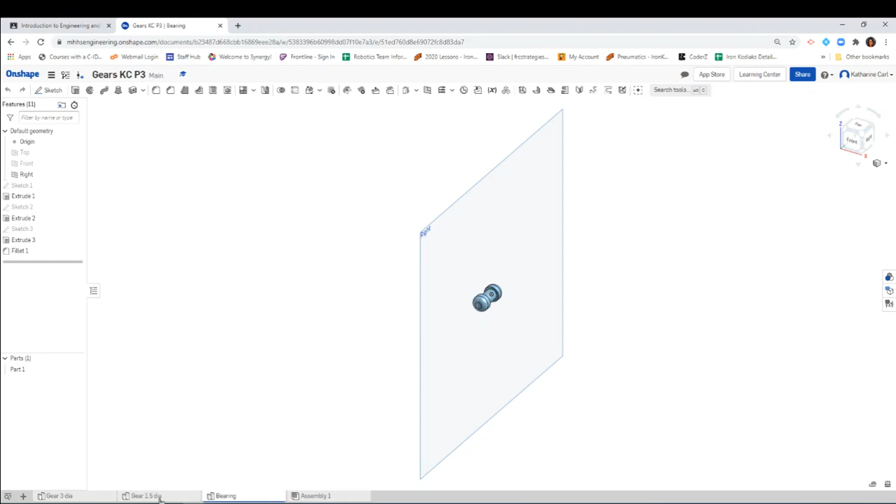Some of you might have the exact same pieces, some might have ones that are a little different. Either way, you need to click on Insert and put in both of your gears and then put in 2 bearings, because you have 2 gears, so you need 2 bearings. Right now, none of them are constrained.

But similar to what we mentioned before, our first step is to always fix one of our parts, and we'll be fixing a bearing. But before we do that, I'm going to fasten my bearing to the origin, because I think it's important to fix things to the origin so we have a good reference point as to where things are located in the graphics area.

So I'm going to go ahead and do that first. I'll click on this Fasten Mate tool, go over to our origin, and notice either the mate connector, which is that disc, is facing horizontal flat, or if I move my mouse it's facing up. I'm going to have it face horizontal flat and click on that.

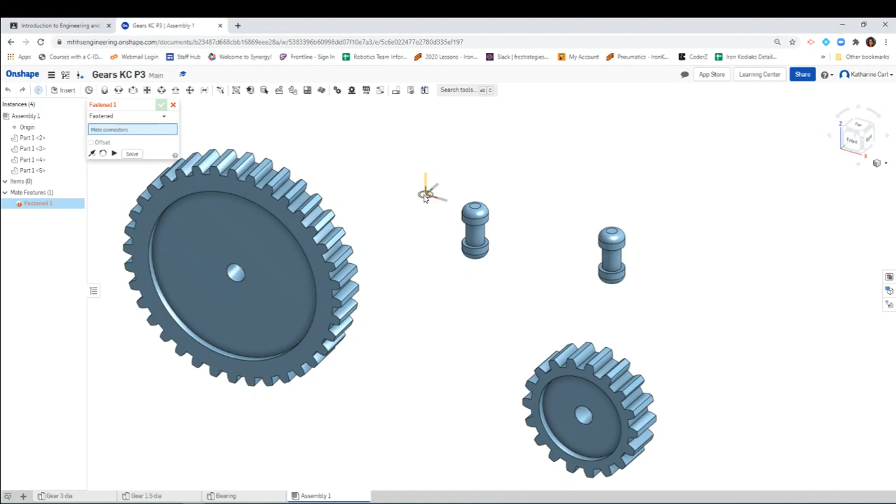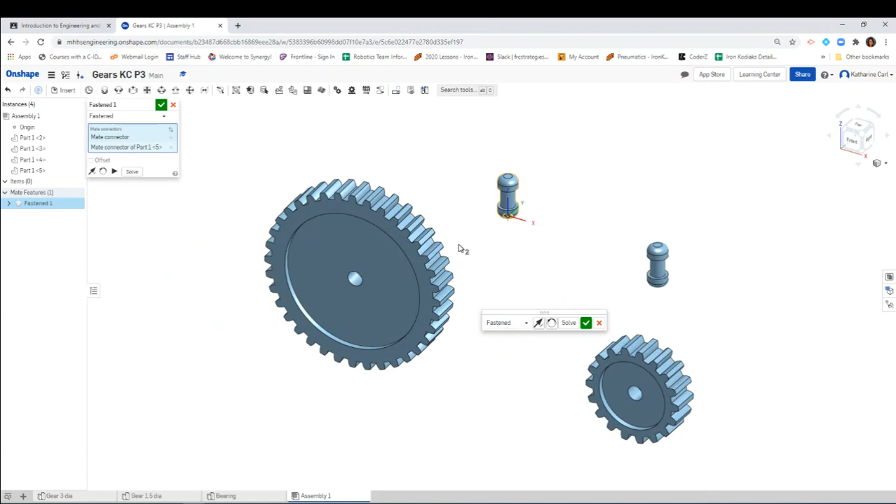Now I'm going to select the bottom of this bearing. I'll zoom in so I can see this whole bottom face better, and just make sure that's on the center — yep, looks like it's in the center. Click to make that stay. If I zoom out and click on my view cube at the corner to get that isometric view, that looks great. So I'm going to click on the green check.

What I'm going to do next is close the Fasten tool, and then fix this by right-clicking on it and clicking Fix. Now notice when I do that, this Fasten Mate turns red, and that's because we fixed it, which is technically interfering with the Fasten Mate.

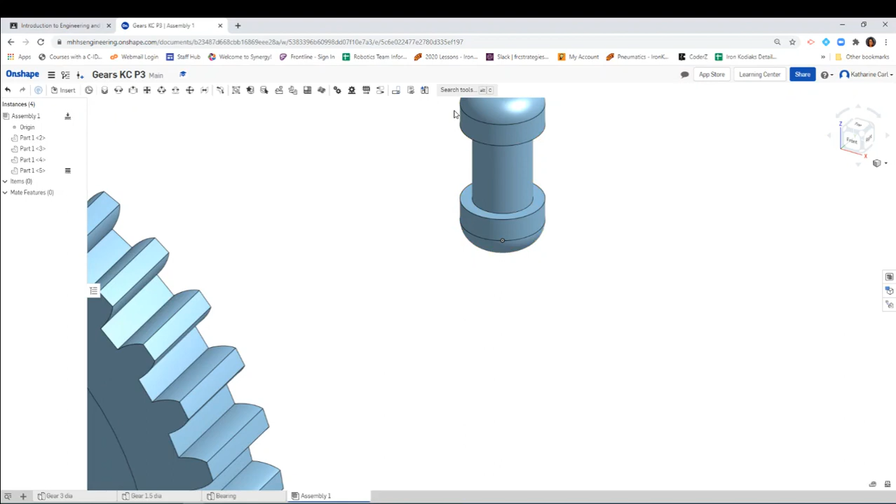So right now I actually don't need the Fasten Mate anymore, because this is fixed. I went ahead, and you can even see the icon over there. So I just used that Fasten Mate to set it up, to locate it and orientate it — meaning the view, how I want it to look.

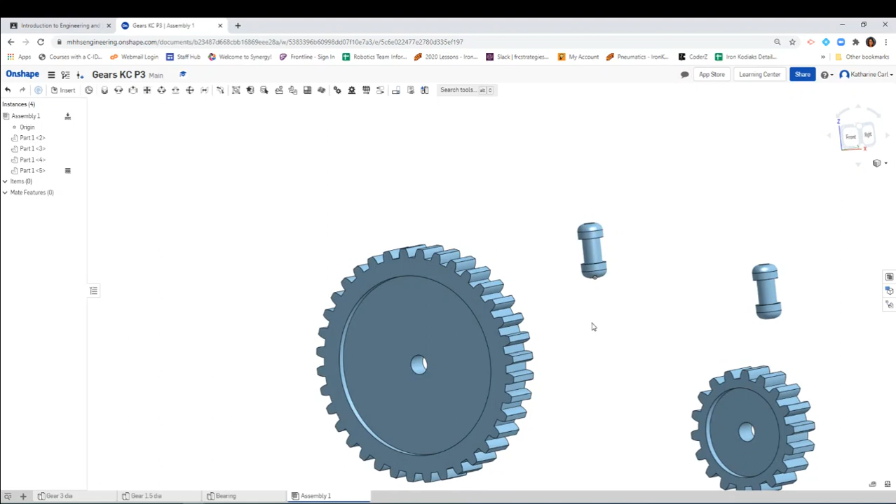Okay, now the next step: I'm going to go ahead and fasten my larger gear to this bearing. In order to do that, I'm going to use a nice little trick to rotate this, because right now I need this gear to turn 90 degrees so it fits nicely in there.

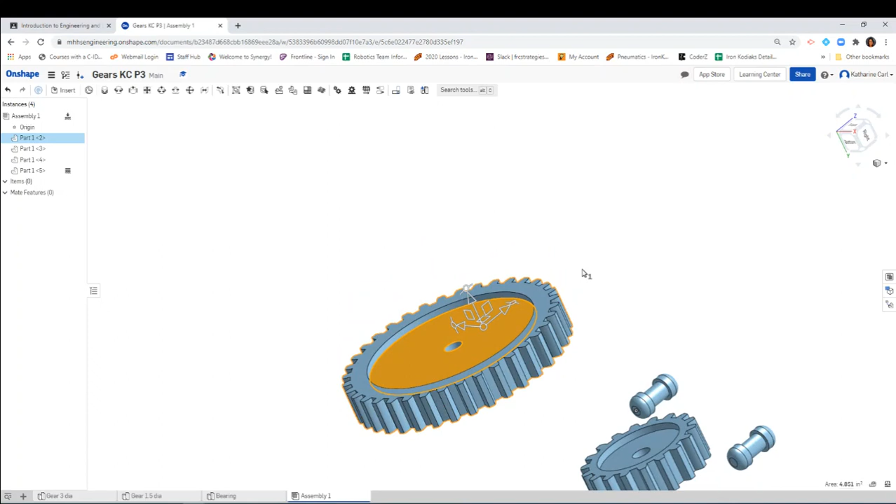So to do that, I'm going to click on this face, and notice these axes turn up — remember the degrees of freedom? Everyone see that? I'll use this top degree of freedom here and rotate it so that it becomes flat. Notice the little box pops open and it says 45 degrees.

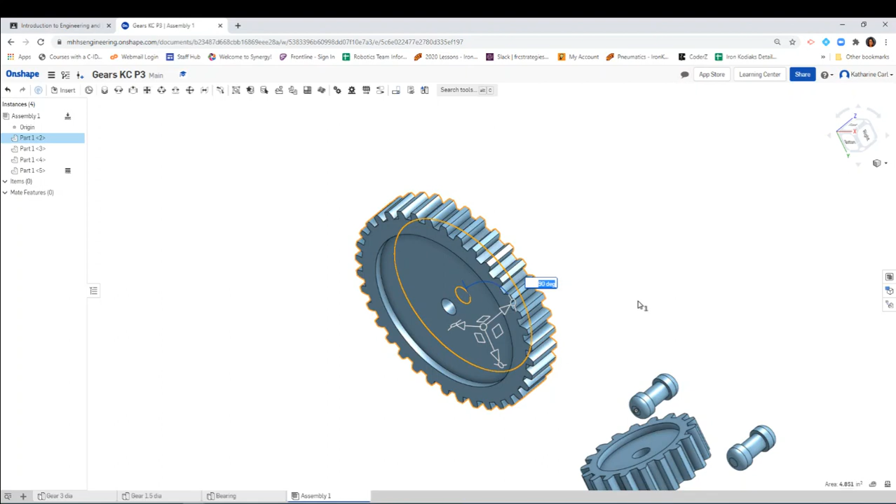I want it to turn 90 degrees, so I'm going to go ahead and type in 90 and hit enter. And it flipped it 90 degrees. That looks good, so I'll click in the space and hit enter so it fully turned. I'm going to double check — it's perfect, look at that now.

When I try to move it, it's in that same plane. So now I'm going to go ahead and use this cylindrical mate — or actually, I can directly use the Revolute Mate. I don't need to do the cylindrical mate, I can just use the Revolute. Click on that, and I'm going to go ahead and select.

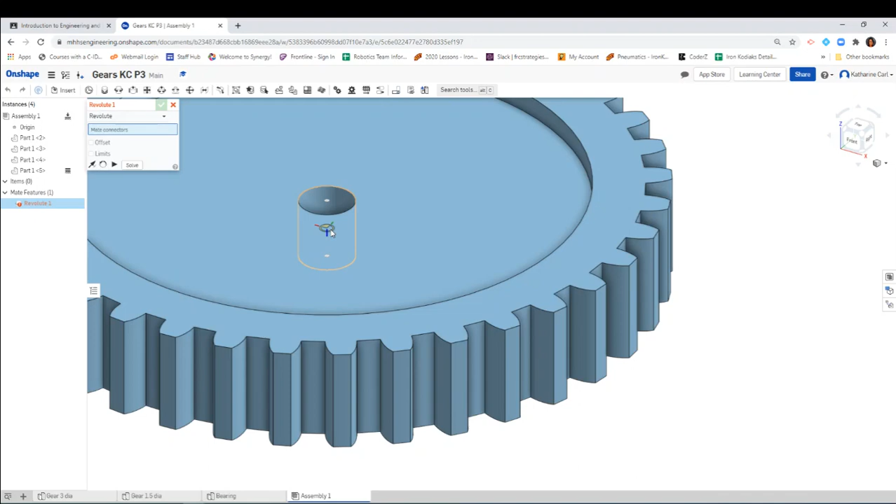See how I went to the cylinder, and if you notice, if I turn that mate connector, that disc is in the center of that cylinder. Let's see if this one works. It might be kind of hard to select it on the other one, but you can do it that way. So move it, if I can find that again, there's a cylinder.

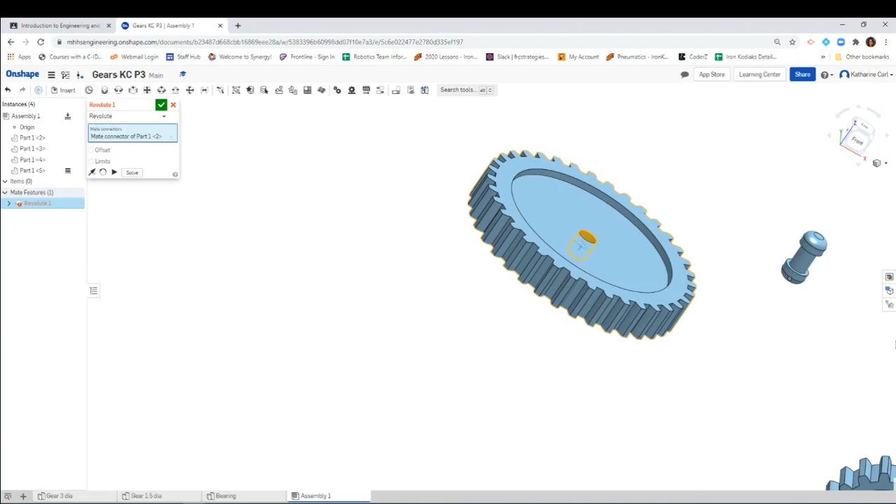That's the middle. Okay, if you click on that one, then what that means is on your bearing over here, the one that's fastened, I'm going to zoom in. I need to select the cylinder, but the center point of that as well. Why? Because then those two mate connectors will connect together. So click on it.

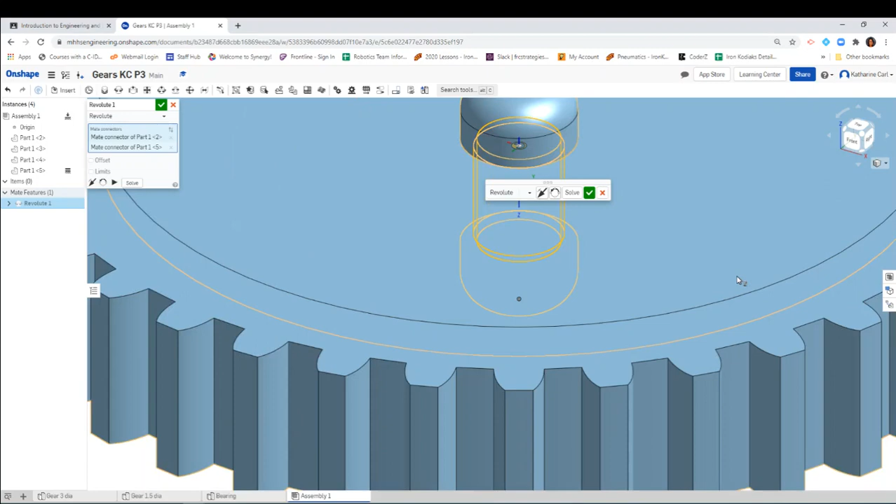And if you notice, there it went. I'm going to zoom out just to get a good preview and kind of rotate it to see it a little bit. Move that out of the way. Awesome, that looks pretty good. Nice, so I'm going to go ahead and click the green check to confirm.

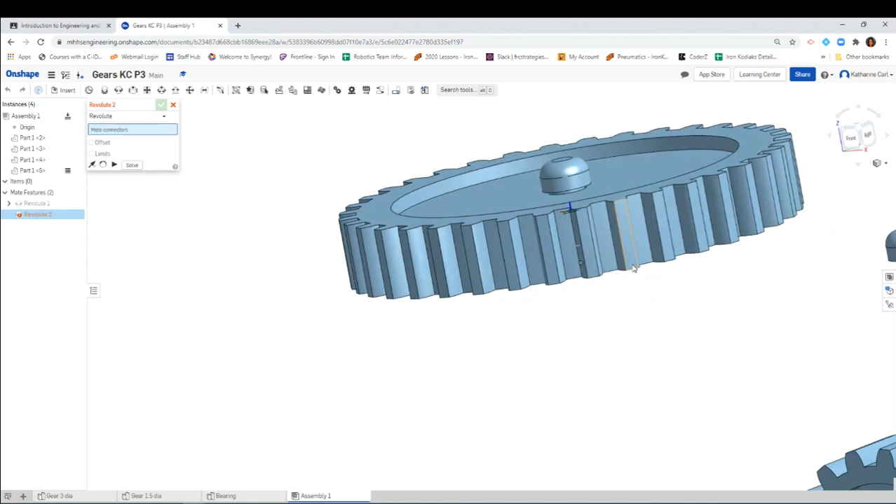And looks great. Again, you can tell it's in the middle because the gear, there's a little gap here, and there's also a little gap on the middle, okay? Let's just verify that it moves. Remember, the whole point of this Revolute Mate is that it changes the degrees of freedom so that it will rotate. And perfect, this gear is now rotating around that bearing when I turn it. Awesome, and this bearing still won't move because it's fixed.

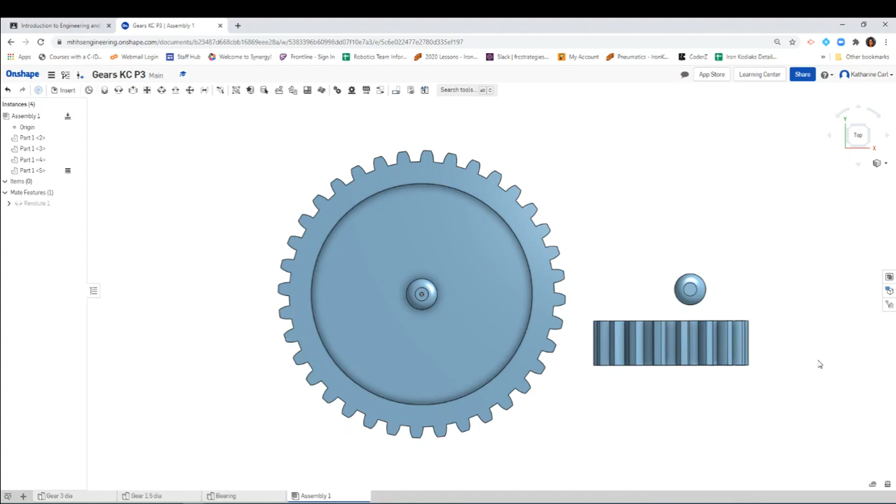So awesome, good step so far. Okay, our next step is we need to kind of start to orientate these two pieces, right? So there's a few things we need to think about. One, if I look at the top view, you want these to be lined up, meaning this bearing needs to be lined up so that it can properly fit this smaller gear. Okay, I also need to rotate that smaller gear. So let's first rotate the smaller gear and then try to kind of dimension and space things out.

All right, so I'm going to click on that face again. Remember, those axes come up. Just zoom in, you'll start to get used to kind of how the axes are. This, you can even play with it. Oh, it goes that way or that way. Nope, let's change that, keep that back at 0 degrees.

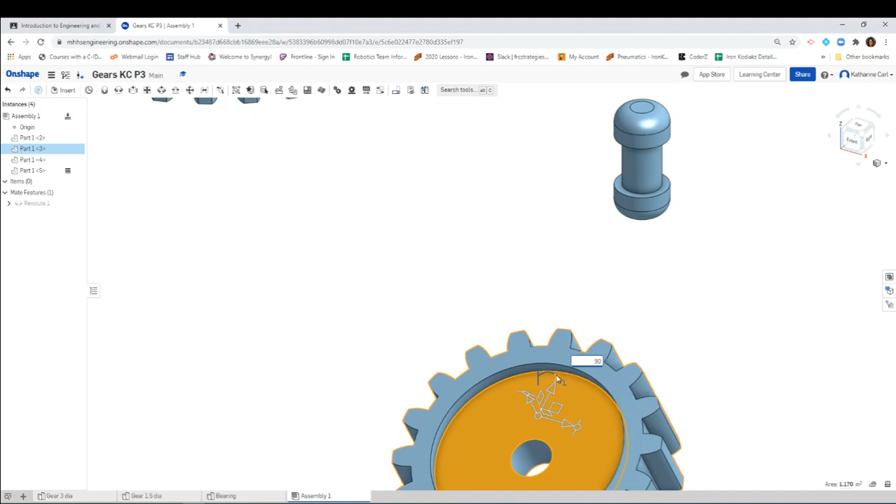Wrong direction. I want to choose this degree of freedom. I'm going to rotate it. Again, I'm just going to type in 90 because that's what I want it to move. There we go, click once on the outside to finish that move.

There we go, so now they are kind of on parallel planes, but if you notice, if I kind of click on this front view, this can go up and down, right? And over, and this, and we need it to line up perfectly. So I'm going to do a few things. And even the same thing with this, right? The bearing, we want to make sure that it's lined up perfectly, and we want to make sure it's spaced out perfectly. You can use the measurement tool and kind of do some measurements.

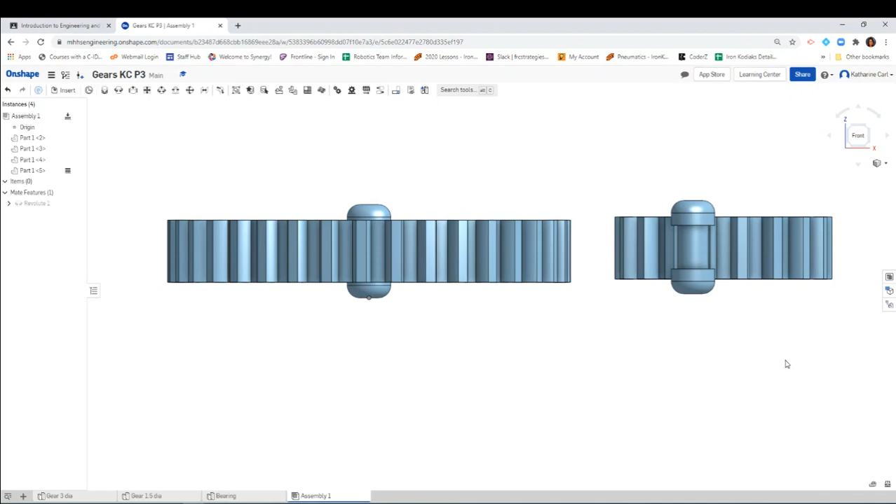I'll show you another way that I kind of like doing it, which is we're going to actually use a new mate tool. This tool right here, this is called a planar mate. And what that does is it causes two planes to mate together so that they are nice, flat, and even. So I'm going to use that, I'm going to use a planar mate.

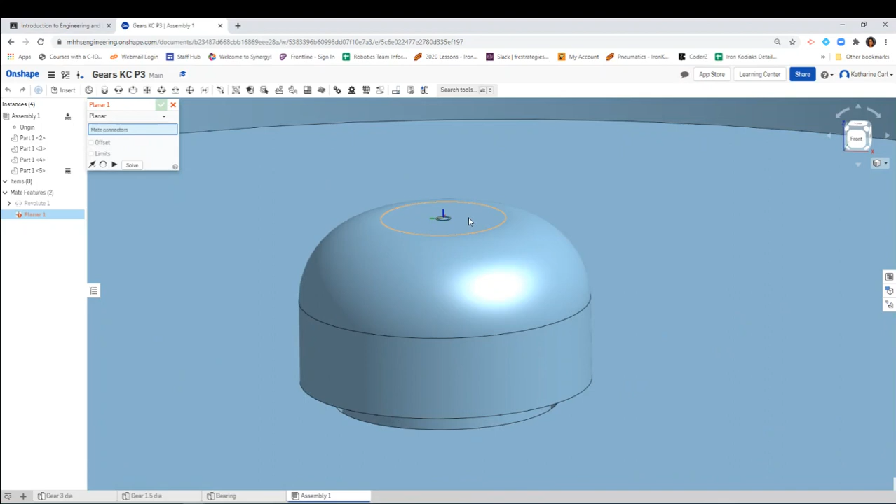I'm going to use this top part of this bearing. So I'm going to click on that. And then I want that to be in line or on the same plane as the top part of this bearing. So there we go. Now let's zoom out to make sure it's there. And I think it actually joined it here. So don't worry, click on the green check.

I'm going to go over here, close this planar mate window. I'm going to go here. I'm going to click and hold and pull that other one out if it is there somewhere. See if we can find it. Should be in there. It is. Okay.

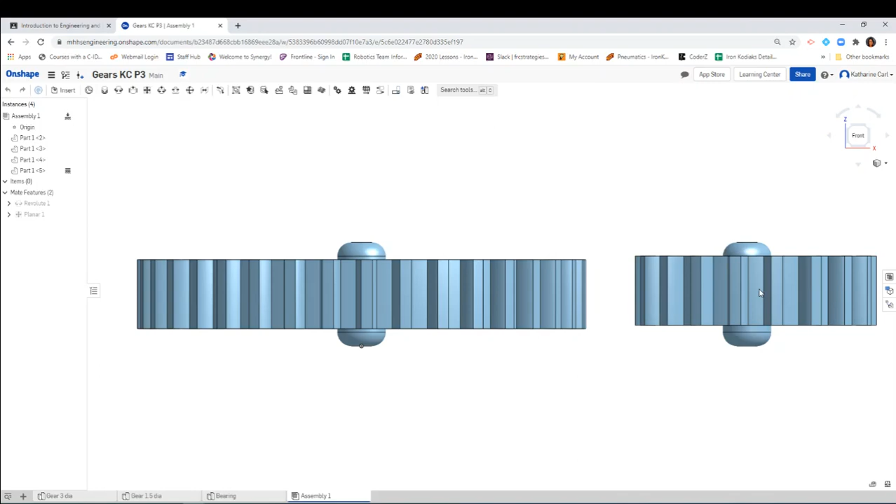One thing to be careful of is sometimes it will appear to be on top. So just click on it and try to move it, and it comes out. But notice the nice thing is it's going to stay — I can't move it up or down. It stays on the same plane, which is what we want. That's a very critical part of these gears.

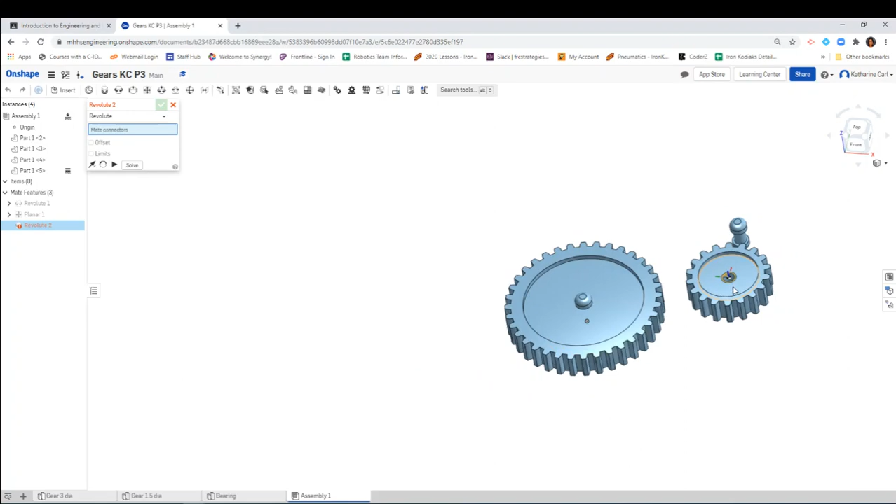The next step is to use that Revolute Mate to constrain, again, the center of that gear with the center of the bearing. So I'm going to zoom in, and I need to find that center point of the gear — there it is. I'll click there.

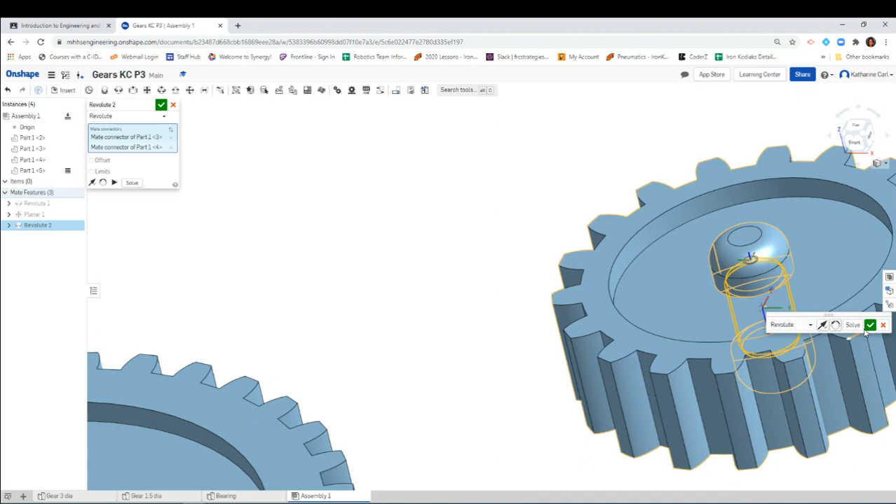I'll go over to our bearing and zoom in here, find the center point, click to make it stay, green check to confirm, then zoom out and close that window. Let's try to rotate that. What's tricky is you can't really tell fully, because this is not fixed, so the whole thing is moving — not only is that gear moving around that center axis, but it's also moving around the entire space because I didn't constrain it.

So that's our next step — how do we constrain them so it doesn't move around that way? Eventually we're going to end up fixing this one. To do that, if I look at the front view, the nice thing is they're still on the same plane, so they're lined up.

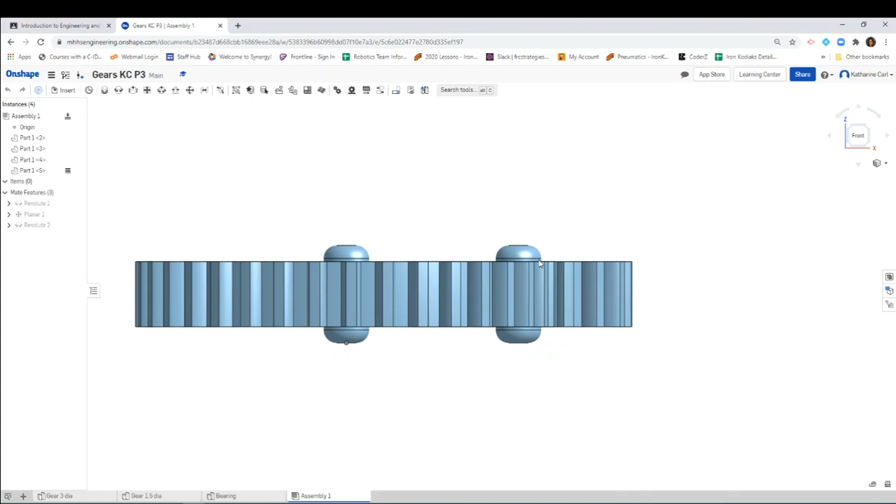I'm going to click here and look at this top view, because I'm going to use this tool called Tangent. Why use this? Because tangent lets you have two curved surfaces line up. So I'm going to click on this.

I'll click on this curved edge, and rotate a bit to see better. I want that inner curved edge to line up with this outer edge, because you want the groove of that tooth to go in towards that piece. So click on that — and notice, it moved them in.

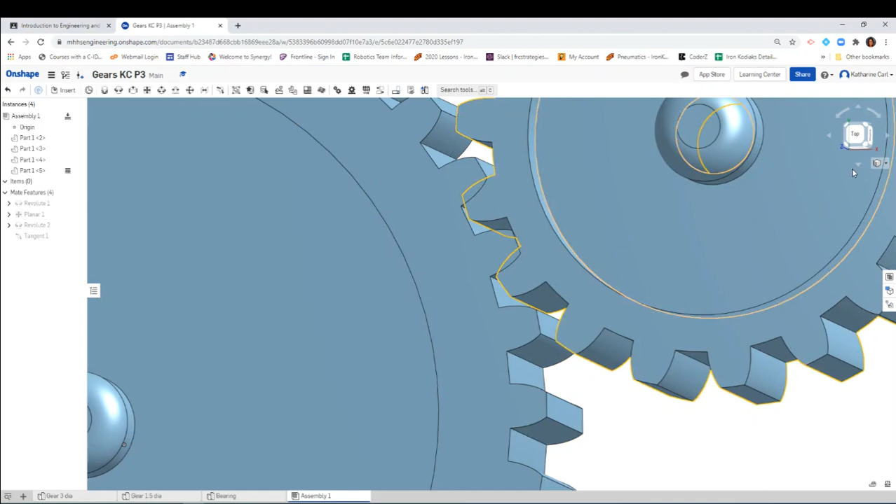Green check. Now it's still going to move, and I'll show you what happens — see how this will still move, and you can actually rotate it and spin it around. Technically, some gears do work that way — this is what we call a planetary gear, because it's rotating around like a planet.

But we want this to be stationary. So now that we're spaced correctly, I'm going to click on that top view, rotate it around, make sure it's in the right spot, and also line up the gears. That looks about right — pretty good.

Now that I have it where I'd like it, I'm going to rotate it, click on that bearing, right click it in the features list, and fix that one. Now notice that planar mate caused an issue, so I don't need it anymore — since it's fixed, I can right click and delete that planar mate.

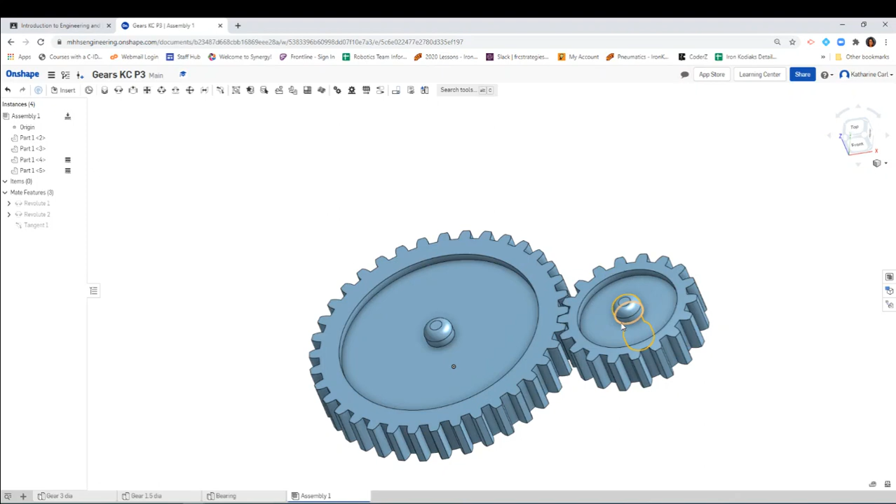I do not need it anymore, because it's fixed. And this gear, the smaller gear, is also mated with the Revolute Mate to that bearing, so we don't need that one anymore.

Now notice it should rotate properly — let's check it out, rotating it around. Awesome, that rotates, it's not moving. But again, the idea and purpose of gears is to have one gear rotate and cause the other one to rotate.

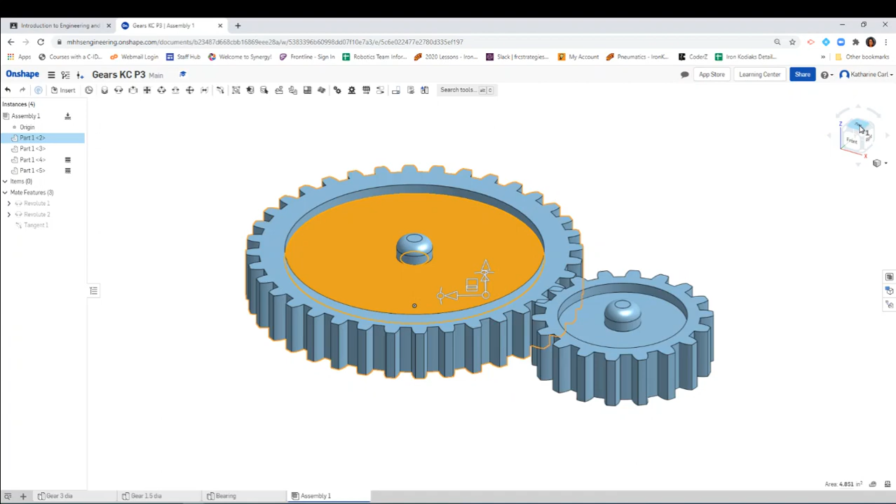So let's just line these up again. I'm going to rotate this — that looks about right. We are actually going to be using this gear relation.

It's a great tool. I'm going to go ahead and click on this one. What you have to do now is click on the Revolute Mates. Another big thing is you have to click and also change the ratio, the relation.

So I'm going to click on this one, and then I'm going to click on this one, and the relation between the two is, I believe, 35 divided by 18. Let's green check. But if you notice, this didn't quite line up. Oh, there it is. Now it's going again.

What's funny is I think I entered the wrong ones, because if I slowly move it, this is where you'll have to kind of test it out a little bit. They're moving in the right direction, right? But that's larger gears moving faster.

Okay, so let's try that again. Delete, and I'm going to click on the top view. I'm going to line it up kind of how I would like it to be lined up. You can kind of rotate this one so that it looks a little bit better. This one. Okay, gear relation.

All right, so this time I'm going to still use that 35 divided by 18, or it might be 16. Let's count—I'll close this to kind of count it up. So ideally what we're doing is we're counting the number of teeth, right?

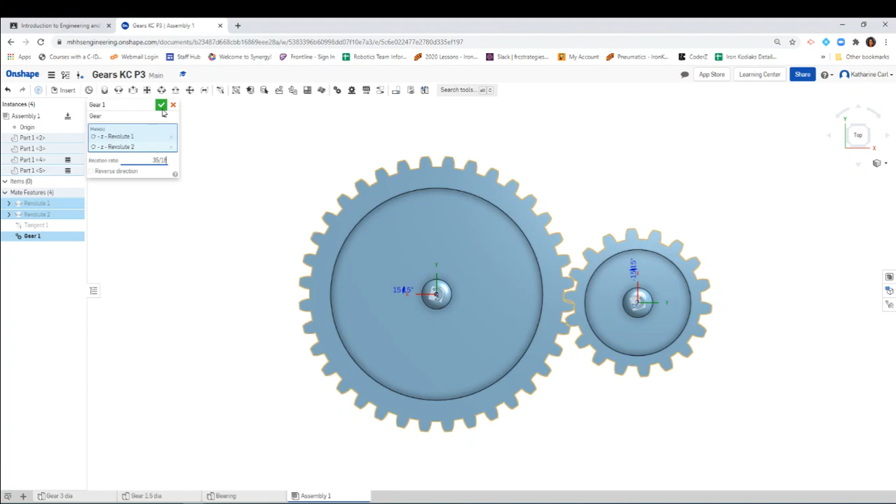And again, we're going to use that relation for the gear relation. So click on the gear relation again. This time we are going to click on the larger one first, then the second one, and then I'll still enter in that 35 divided by 18. I'm going to go ahead and click on the green check.

And let's go ahead, turn and rotate, and let's see, make sure it's going in the right direction. Rotating it kind of fast. There we go, they are going in the right direction.

So if you notice your gears are not rotating correctly, like if they're rotating in the wrong direction, you can just double click on this gear ratio again and reverse direction. I'll do it so you can see what happens. So now when I do that, if you notice, they're both rotating in the same direction, but that's not how those gears would really function, okay?

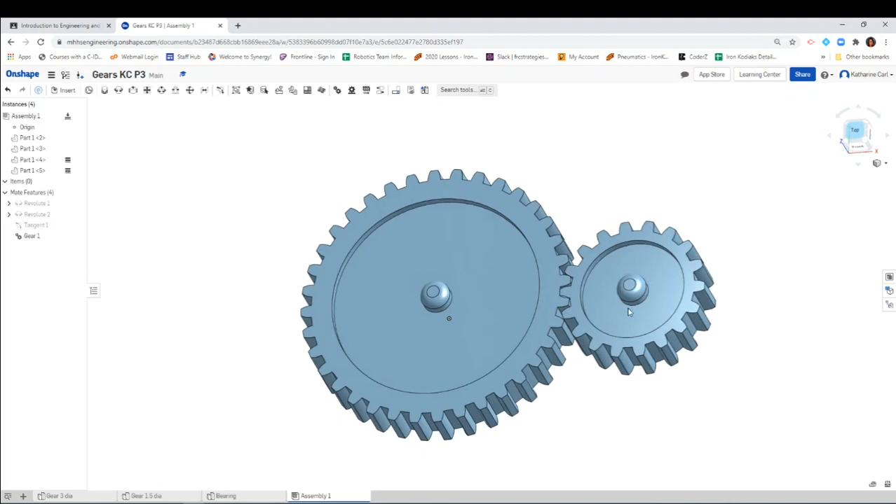So double click on it, click on reverse direction, and again click on the green check. You'll notice when you are rotating it, you have to move your mouse slowly—you'll notice that it doesn't fully take into account if there are conflicts, okay?

So you can start to modify it. Mine were partly probably due to a slight dimension that is off. But as long as you have it working properly and moving properly, then you are good to go—nothing else is moving out of its spot, and the gears are moving in the correct direction.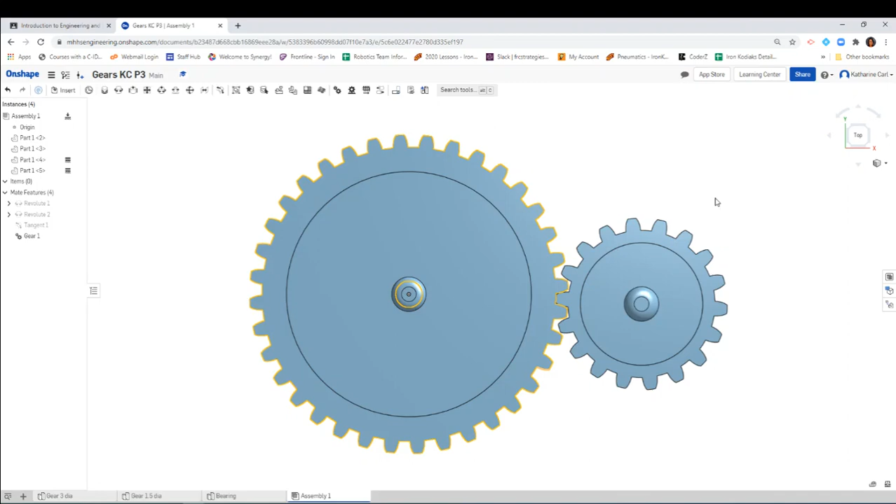And that works. Yeah, it looks like my gear ratio is off a little, because if you notice, now they're meshing well, but the initial one, as I keep spinning them, it's off a little bit, okay? But again, don't worry about that right now.

Right now, our purpose was to build two gears, understand the different sizes of the teeth, how to create that pattern, and then also assemble it together and use some of the new tools in the assembly to create a gear train.